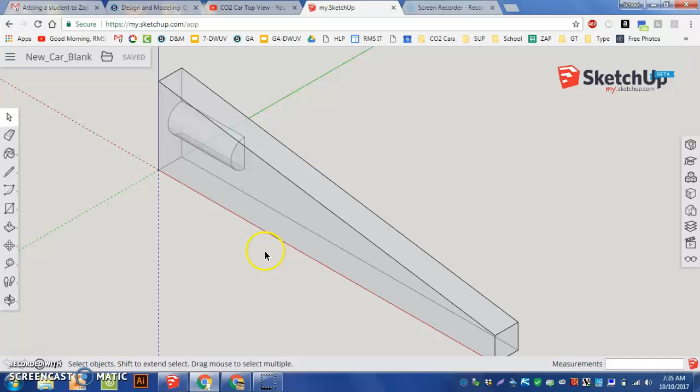Alright, quick part here where we're going to talk about top view cuts. Top view cuts are kind of difficult, and we'll talk about them.

So first thing I'm going to do is just draw an arc on the bottom so that people can get that understanding of what's going to happen there. And I'm going to draw an arc on the front so you can get that understanding as well.

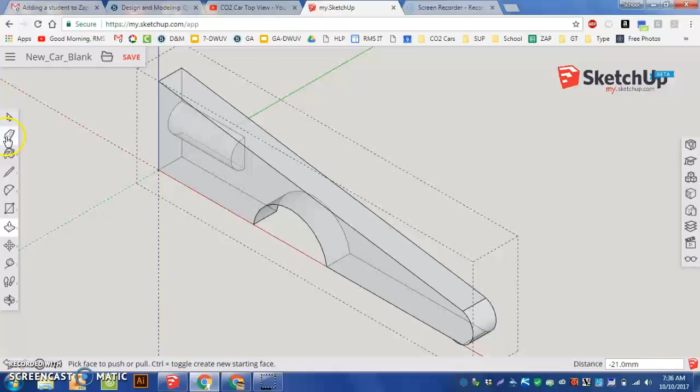I'm going to pull those off of what we actually have to do here and what we have to accomplish. So we got a car made up here. I'm going to erase that little bit there. If we're going to do something on the front, rounding off the sides or anything like that, we need to have a flat bottom back on our car.

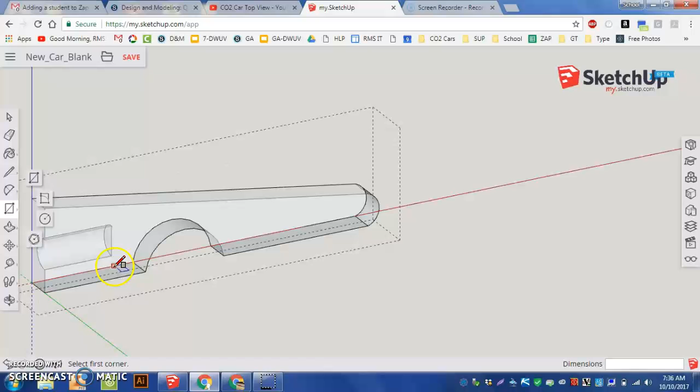So how we get a flat bottom here is I'm just going to take the rectangle tool and draw from two original edges and fill that back in. So now I have a flat bottom. I know it's filled in, we'll take care of that later.

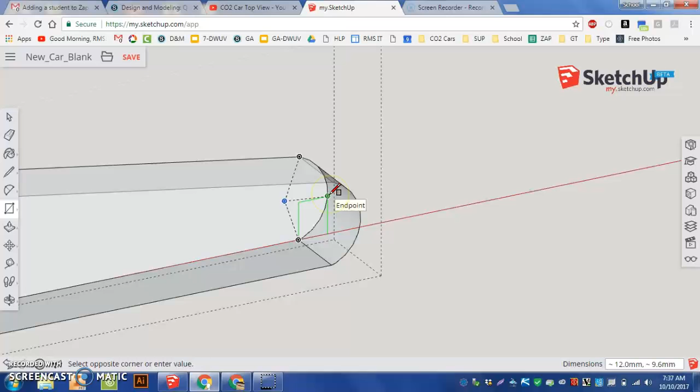If I'm getting a flat bottom on the front over here, I'm going to use the rectangle tool and go on the front view of it and draw to the furthest out point and pull that back on. That's going to get my front view flat bottom. So now I have my two flat bottoms. I'm ready to do my cutting.

This side here, I'm just going to use a pencil tool. I'm going to make some funky stuff. Now be careful because all of a sudden you can get hooked into the back of it.

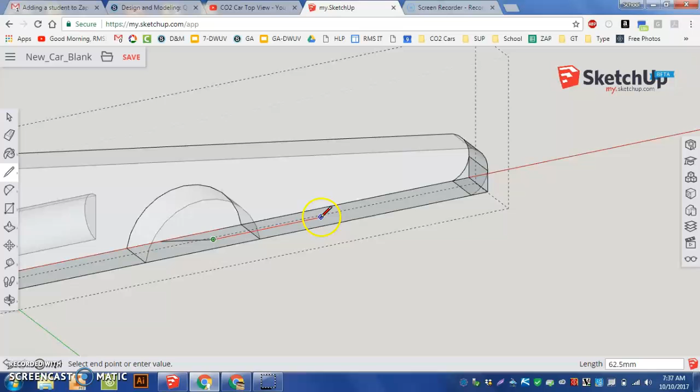And I can come out and I can pull now up, tapping the control key. So again, I'm going to go here. If I don't tap the control key, it gets stuck. Tap the control key, it comes right out the top.

And now comes the cutting. Triple click, right click, intersect faces with model. And it just cut all those lines for me.

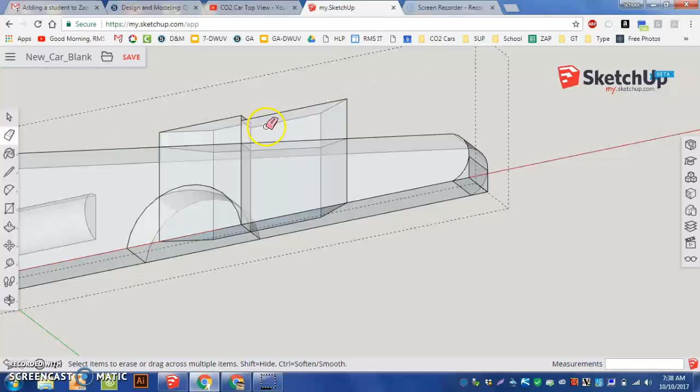That allows me to do some erasing across the top. Now I can do some erasing across the bottom. I have lines made there.

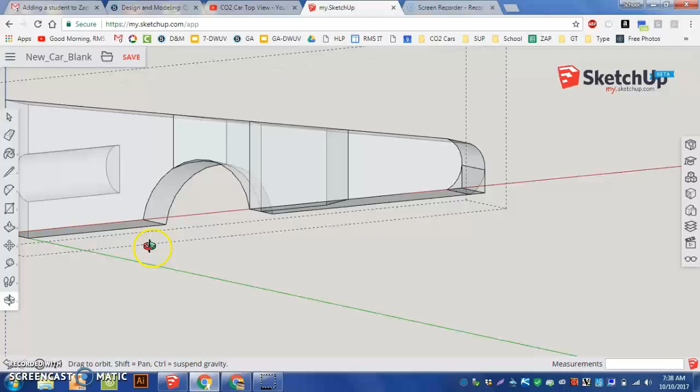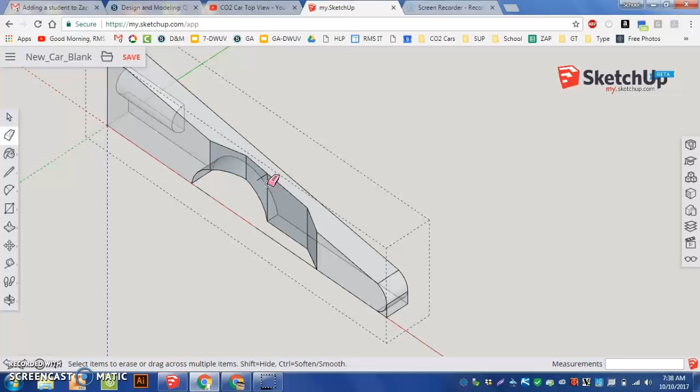Now when I rotate up, I can erase at my top view. Oh, I can see I erased too much there. Same thing, undo. I have to zoom in a little bit to catch those.

And we're good. And that's that top view cut. So if I take a look at this, I got a top view cut, I got a front view cut. If I go over here, go to orthographic, I can see what that turned out to be like.

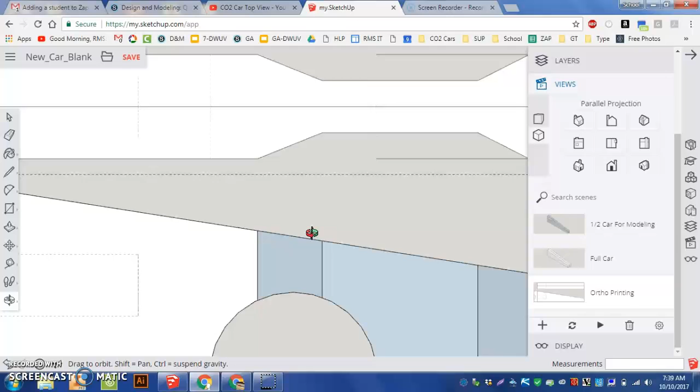Let's finish up this front here. So we did a line there, we're going to do an arc on the front. So remember, we don't want to make it a full arc, we want to make it half of an arc. So I start here, bring it back, bend it, make sure I'm staying on this line. Oh, that didn't stay on the line. There, I stayed on the line.

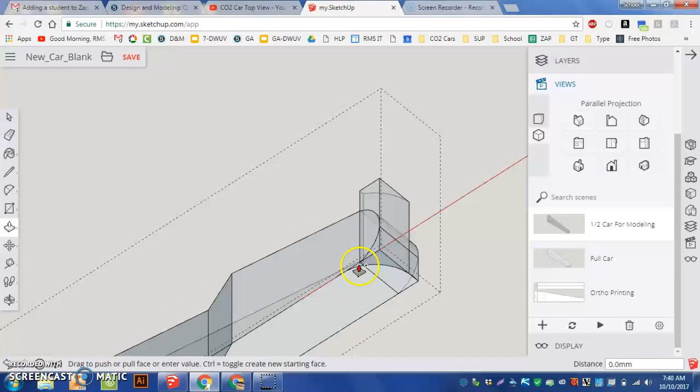Push, pull again, tap the control key to bring it all the way up. Triple click, right click, intersect faces with model, erase off the top, whatever's hanging out over the top here.

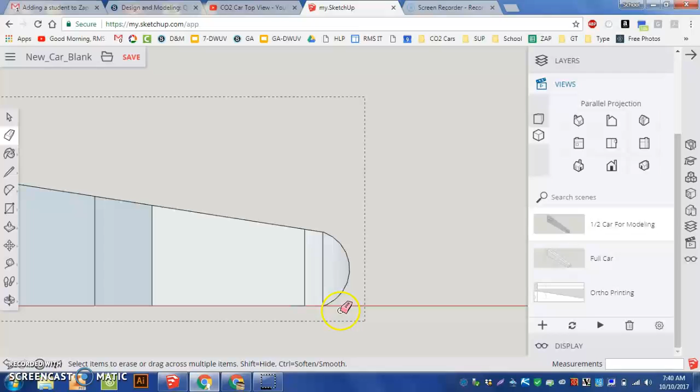And then I like to go to front view, and this all here can get erased. And then I like to go to top view and erase out here. And now I have that finished up.

If I go to full car, you can see I have a rounded front. Oh, got a little line here to clean up. And that takes it off over there. But I got a rounded front now. And that's how you do your top view cuts.